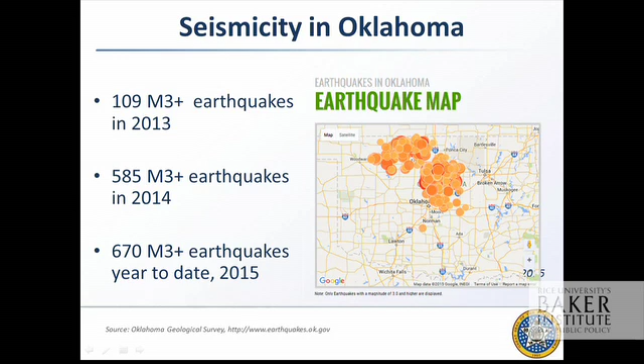That's the toggle showing all the earthquakes, probably just this last year. There's another toggle below that—you can also show where all the injection wells are. So we're not hiding anything, we're not pulling any punches. We think it's disposal wells.

But I can bring my hands this close and say it's disposal wells—I don't know what aspect of a disposal well. I don't know if it's depth, I don't know if it's volume, I don't know if it's rate. Is it big wells, little wells? Is it time of day? But it's disposal wells.

We have 4,200 disposal wells in Oklahoma. And that doesn't count Osage County, which is a really bright white one up there, because in Osage County the BIA manages or attempts to manage the oil and gas industry. So we don't regulate up there.

4,200 disposal wells. Now, Larry Bengal, the oil and gas guy from Arkansas, gives me crap all the time that they fixed their earthquake problem because they had six disposal wells and four earthquakes—or flip that around, something like that. Six disposal wells, four earthquakes. They shut down the six wells and the earthquakes stopped. Okay? We're working on 700 earthquakes, 4,200 disposal wells. You cannot find, or we cannot find, the one-to-one correlation that would make this much, much easier—certainly much easier from a regulatory and operator standpoint. This is an area problem, but it's absolutely about UIC wells.

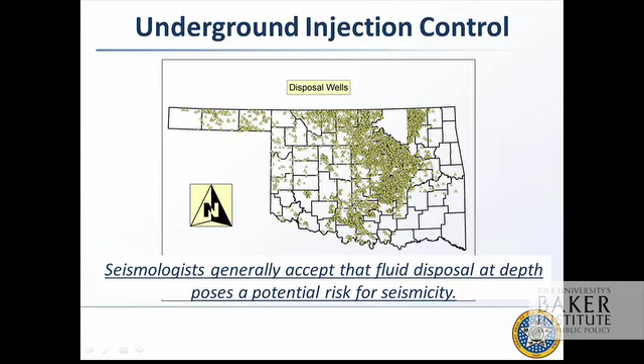So, tying back to what Roy was talking about, is there an opportunity to solve not just the earthquake problem? That's how much water we disposed of last year in one year. Kate this morning was showing pictures of Lake Travis—for us, if you're from Oklahoma, that's 1.5 Lake Thunderbirds, which is the water supply for Norman and South Oklahoma City. That is a lot of water.

So is there an opportunity that we can go after? I really appreciated that Kate showed a drought slide today, because I normally feel like I'm the only guy at an oil and gas conference who talks about drought. I know, from looking for fresh water, but there is not a silver bullet to the drought.

Now, I did cheat a little bit—that's the drought monitor from May 5th, five days into the month of May, when we got 28 inches of rain in one month. Very much what Austin got as well. The drought picture looks very different right now.

The problem I have with that is people think the drought's over, success, declare victory and go home—and it's coming back. This is not the last time Oklahoma or Texas or any of the western states are going to be fighting a drought. So what are we going to do to be drought resilient? We've got to be better about it. This is not a silver bullet.

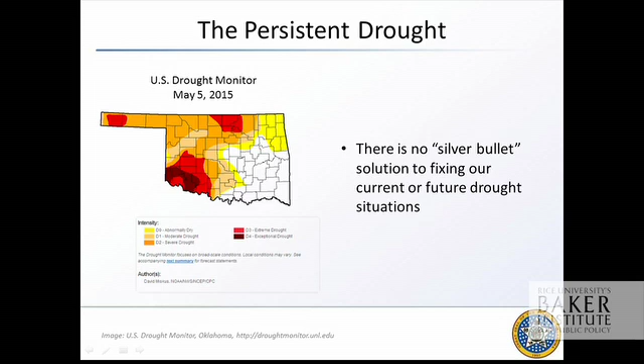Water conservation is a huge piece, okay? People keep looking for new sources of water. I might have your new source of water, but it's not cheap and it's not ready yet.

So this is a picture of a Devon facility, at the Cana Woodford. It's their recycling facility. Similar, Roy, to your comments, this is about using less fresh water and using it smarter. In one of their operations, can they take their flowback water, because it's not that high in TDS—their produced water—can they clean that up to at least a level that they could use at the next well? There were regulatory and technology barriers to them doing this.

On the regulatory side, it was really where the state came in with the Corporation Commission. How do you change, make exceptions to your current regulatory framework that allows innovation like this and still protects the environment? Because you've got to do both. On the technology side, that's really not what the state does, but the same thing—there were barriers, and how do you overcome those?

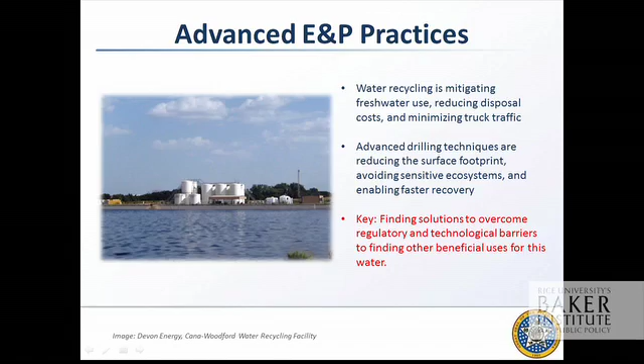And my question is, can you do the same thing for produced water? So I took off 'beneficial use of produced water' because I really think this is about drought resiliency, not just beneficial use of produced water. And you know, if you just change that piece right there, you change the conversation. Because I keep talking about drought resiliency with a bunch of oil and gas guys, and they stop.

In the middle of that they say, 'I'm not in the water business.' You brought 1.5 billion barrels of water to the surface—you're in the water business. Get over it, okay? And you live in Oklahoma, so be part of the solution. Just changing that title is huge.

The fact, Linda, that you've brought this group together, and that Tony spoke at lunch, that's huge. Because if we don't get out of our silos, we will never fix this problem.

So the opportunity is the same—it's produced water on the side, and the big black box in the middle is technology to clean water at scale.

So Rick McCurdy is here—I will use your example. Rick has a folder on the desktop of his computer called 'The Solution.' At last count, there were several hundred PowerPoint presentations in there of somebody claiming they've got the Holy Grail. And that's not to make fun of the companies that are starting to really be serious about this.

I'm really glad that you're next on this agenda, because there are companies out there working on this that really do have a good solution, and recognize that they may not have the Holy Grail, but they've got this piece of it. So can I get that piece, and this piece, and this piece, and start putting these things together towards a solution? I think we've got to do that, but it's got to be at scale.

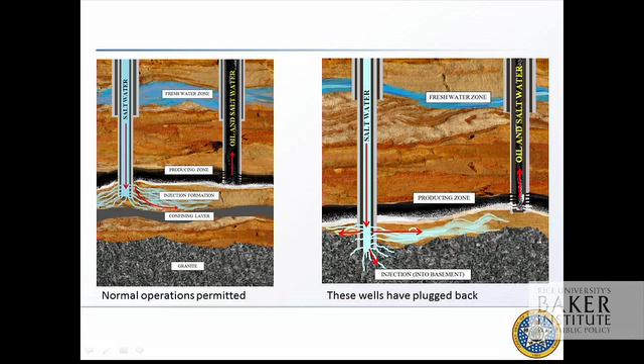If you talk to Kansas, they think it's volumes. So Kansas took two counties, Harper and Sumner I think is the other one, and they've stair-stepped the volumes down in those two counties about 50% because they think it's volumes. We're both watching each other to see which one works. It sounds funny, and it's not funny if it's your house, but nobody knows yet, and we're watching each other to see - if that works, we're doing it here, and if this works... I actually do think it's a combination.

Thank you, excellent presentation, both of yours worked really nicely together. To achieve your long-term vision, what kind of partnerships and stakeholder engagement, what different groups need to get together to achieve the longer-term vision of keeping the water in play?

We're probably about a month before we announce something. When we brought this coordinating council together for seismicity, it was really pretty easy to figure out who ought to be in that room - the geologists studying the problem, the regulators, the Corporation Commission, the regulated community, the academic community. I think on this one it's water providers and users. So I don't need somebody in there who says, I'm an oil company, not a water company - that's not helpful to the conversation.

We need companies that are being proactive about it. But it needs to be oil and gas, it needs to be utilities, it needs to be municipalities, it needs to be the ag community, it needs to be our regulators at the state, and probably some of our federal folks as well, federal partners - that's sometimes a hard sell in Oklahoma and Texas.

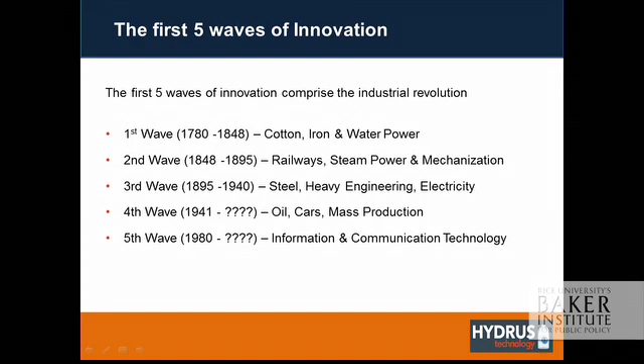The Russian economist Nikolai Kondratyev first postulated the major cycles of innovation in 1925. The five initial major economic cycles have been defined as the Industrial Revolution, the age of steam and railways, the age of steel and electricity, the age of oil, cars and mass production, and the age of information and communication.

The global financial crisis of 2007 to 2009 highlighted the start of what I call the sixth major wave of innovation, that of resource efficiency. This new wave is heralded by changes in the market, societal institutions, and technology that reinforce each other, including rising scarcity of ore grades, increasing water demand, and growing recognition of the economic value of the environment beyond its potential as a resource.

The sixth wave is more than finding new ways to generate energy. It's about minimising inputs, maximising outputs, and minimising or eliminating waste. This thinking provided a massive opportunity for a water treatment technology that went beyond the traditional chemical and membrane approaches that dominate the world today.

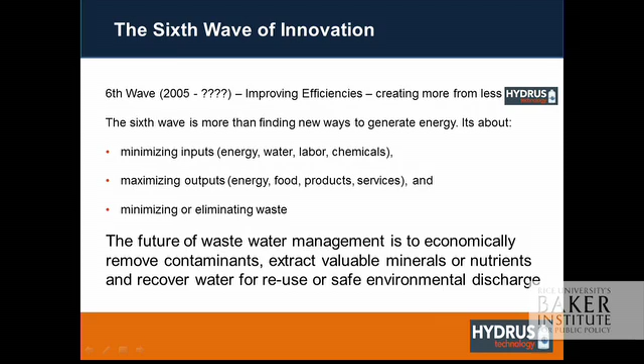Hydrus Technology is a technology company, and our approach to the market is to adopt an outsource manufacturing partnership style to deal with compliance, quality, delivery and logistics, and then leverage implementation partners to operate our units in the field with their clients.

The Hydrus model is the Intel Inside approach. We provide front-end technical sales and support, the hardware and training to operate it, and back-end technical support. All our units are remotely managed and monitored, so we know exactly what's happening at every step.

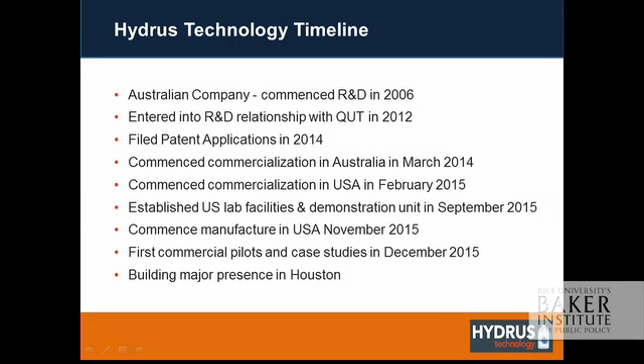Our reason to build a manufacturing and implementation partner model is, on one hand, to deliver a better product, but on the other hand, to streamline the legal and regulatory obligations and requirements upon us as a new entrant into the water treatment market, particularly relating to the energy and mining sectors.

Hydrus is at the leading edge of the paradigm shift in the way water and wastewater is treated and processed in municipal, energy, industrial and resource plants globally. We have set the new benchmark in cost-effective recycling of wastewater, removal of harmful contaminants, and recovery of valuable nutrients and minerals.

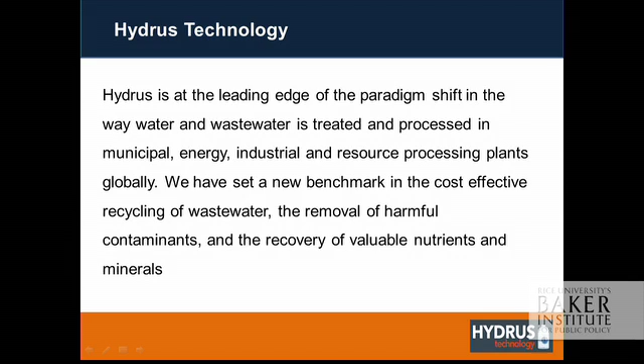Positioned at the intersection of this shift, Hydrus offers exclusive patent-pending technology that provides significant cost and benefit analysis and productivity improvements across a range of industries with global relevance. Hydrus' approach has been to make it disruptive, make it enabling, develop a compelling value proposition, back yourself and go hard.

Hydrus has developed and owns the intellectual property for advanced electrochemical and catalytic enhanced oxidation processes. That might sound like a mouthful, but we have a range of chemists back home in Australia that live and breathe this all day long. Our technologies have broad application across the energy, mining, industrial and food production sectors.

We have enabling technology with proven capability to solve some of the world's major commercial, natural resource, and environmental challenges. Hydrus technology provides wastewater treatment, mineral recovery and environmental remediation solutions that use significantly less chemicals and labour inputs to achieve greater treatment capacity with a smaller environmental and infrastructure footprint.

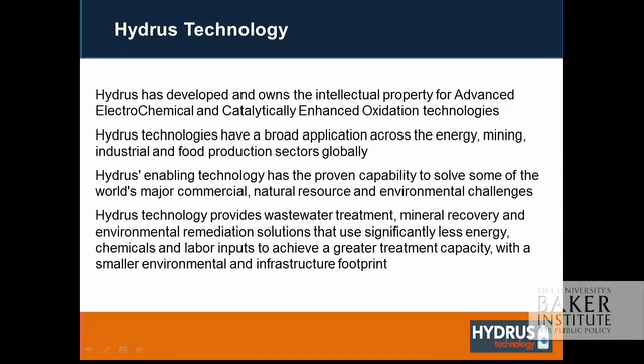We've developed the intellectual property that delivers high-value solutions, and around that we spent many years working on an old technology called electrocoagulation.

That technology was first invented in 1906 and wasn't ever much good. It wasn't until the mid-80s that an American made it tolerably acceptable, with unpredictable outcomes, highly expensive, highly inefficient in our view, difficult to maintain, difficult to operate.

So in 2006, we developed the technology, or we deconstructed that technology, and at a molecular level understood how it works. What happens when you turn on the power? What happens when you change the flow? What happens with the total water matrix, boron at one level, barium at another? How do you really deconstruct water and reconstruct it without the contaminants?

When we reconstructed the technology, we built what we call the Hydrus value spectrum. That means if you look at the vertical market applications, the more complex the wastewater stream, the lower the competitive landscape and the greater the value to Hydrus and its clients.

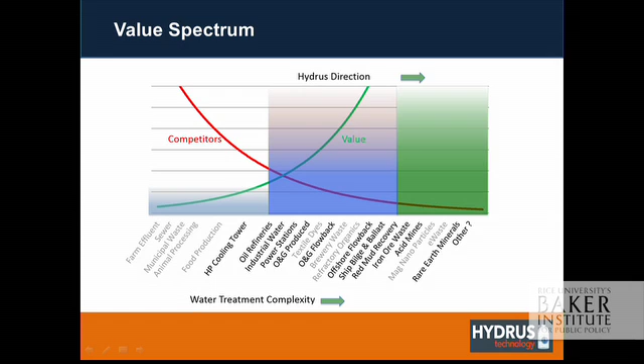We don't operate in the low end, municipal waste, sewerage and those. We have a value proposition there, but everyone else does that. We work in the complex to more complex end of town, which is oil and gas wastewater, acid mine drainage, nanoparticles, and other seriously complex water treatment issues that membranes and chemicals just can't solve, or can't solve economically.

By way of example, hydraulic fracturing has been around for a long, long time, probably 75 years, and it wasn't until about a decade ago that it was optimised and changed the game to produce the outcomes we all know today. The electrocoagulation technology we've worked on has been around since 1906, but it wasn't until we took hold of it in 2006, with Queensland University of Technology, that we deconstructed it and turned it into what it is today.

The first vertical market application we're engaging with is the oil and gas market. We've invested considerable time and resources in conjunction with the Queensland University of Technology to further research and develop treatment solutions for the fluids used in exploration and appraisal, stimulation, completion, production, and workover drilling operations.

In Australia, our first phase of commercialisation was to prove the commercial benefit to customers. In this climate that means demonstrable bottom line savings and compelling operational efficiencies. You can talk environmental benefits all day long, no one really cares, until you prove up the cost benefit equation. Then you add the environmental benefits as a freebie, and that gets their attention — they get to have both.

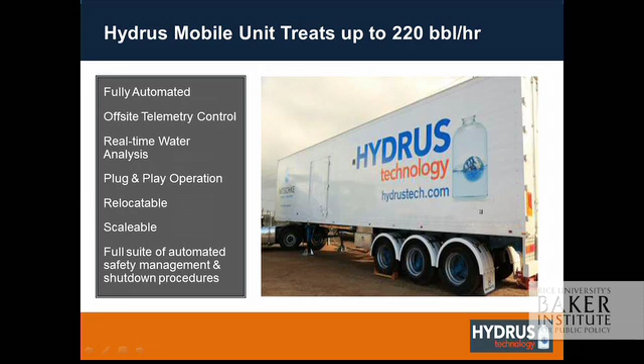That's a shot of the inside of the unit, so they're all managed by telemetry. We capture all the big data for future field production or for management use by our clients. It has minimal labour inputs required — simply a roving technician on the oil field can monitor the device 2 or 3 times a day, and it can manage a wide range of contaminant inflows without recalibration.

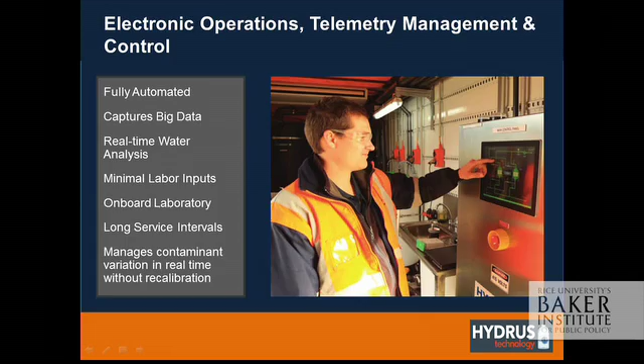To give you an example of how we operate: we take a water sample from the client and undertake a very detailed and comprehensive water analysis to understand the entire water matrix. Then we ask the client what it is they want as an outcome of this water, depending on whether it's for reuse, environmental discharge, irrigation, or cattle stock watering, etc.

We then run the water through our stage 1 device in the trailer and produce the results the client requires, using pH, pressure, electrical potential, oxidants, catalysts, and some proprietary accelerators we've developed. The stage 1 EC technology in this market, certainly in southwest USA, is sufficient for reuse in fracking or in the oil and gas field. We can take out boron to required levels, barium, iron, bacteria and other contaminants, so we can, to an extent, dial up the water mix required for the next frack job.

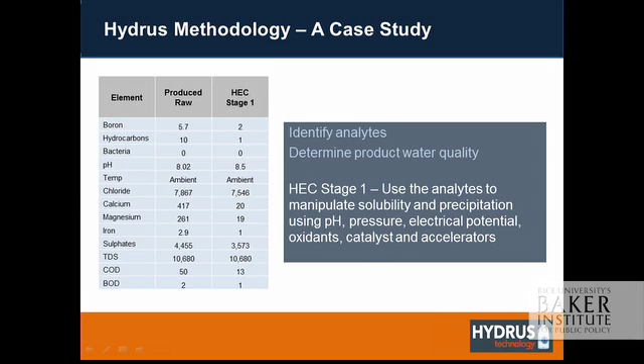To the extent the client requires improvements in water quality, whether it be for irrigation or, dare I say it, drinking water quality, or environmental discharge, we can run it through stage 2 or stage 3 Hydrus technology, all resident within the trailer.

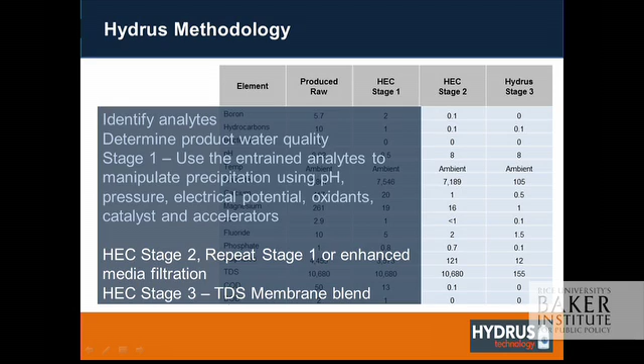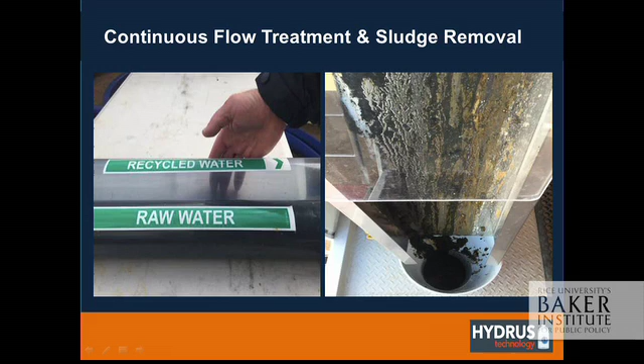So the Hydrus proposition is to buy less fresh water, haul less fresh water, treat wastewater on site for reuse, and avoid hauling waste off-site and disposal fees.

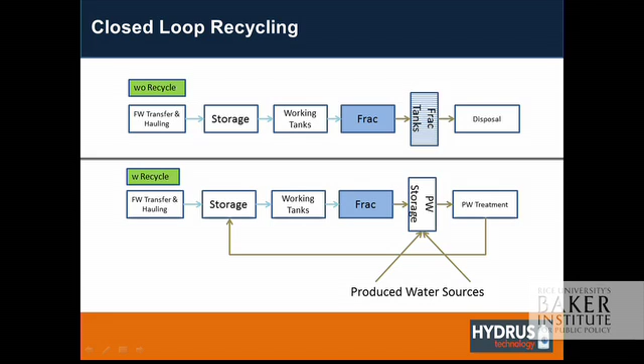The Hydrus technology value proposition is to reduce transport of fresh water to site, reduce transport of fracture flowback or produced water off-site, eliminate waste disposal charges, and improve water use and management logistics. You'll end up with final products that are clean, clear water and a benign, spadeable landfill.

The treated water can be reused in drilling operations, stored, or used for safe environmental discharge, and we can dial up specific water outcomes.

There isn't a technology that we've come across that can degrade refractory organics, particularly those used in fracture flowback fluids, like Hydrus can.

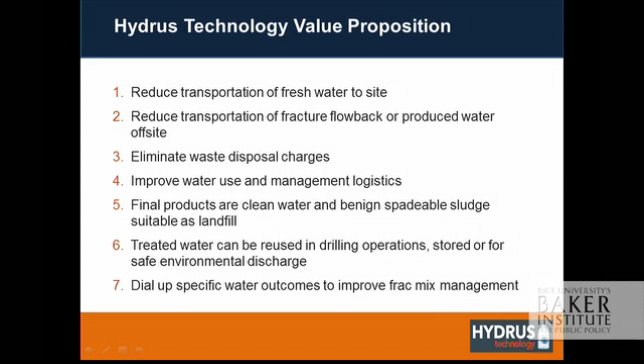We can produce multiple options for water treatment. We can produce fresh water for discharge. We can produce water for reuse. We can have a custom solution depending on the water requirements, and we can deliver onshore or offshore benefits.

The financial benefits include reduced freshwater purchase and transport costs, reduced wastewater transport costs, reduced wastewater disposal costs, reduced chemical costs, reduced labour costs, and reduced capital expenditure. The way we look at it, we can reduce the cost of water by 14 to 40%, depending on where you're drilling and what the logistics are around your particular operation.

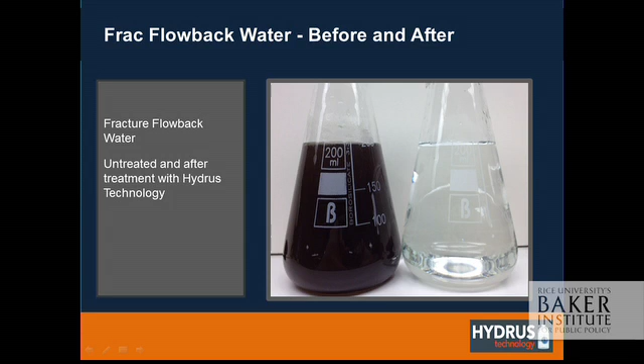The environmental benefits are greater compliance. As I said before, the companies we're dealing with in Australia and the United States, it's all about the money. Show me the money, then talk about compliance or regulatory or environmental compliance next. We have the benefit of offering both. The second one comes free. You get the good corporate citizen status. People are sick of having trucks barrelling down the highway at 3 a.m. and road degradation. There's a whole range of good things around better environmental compliance, whether that's now or coming.

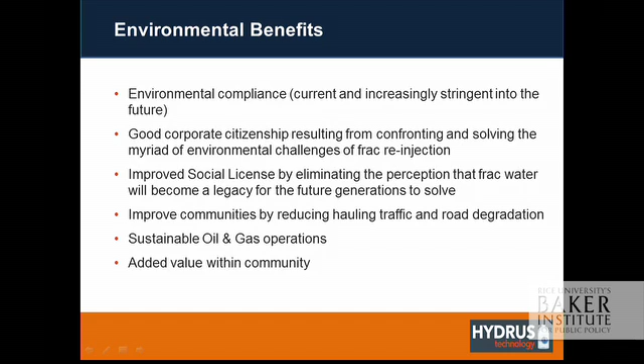We also believe that we can offer a better, more sustainable oil and gas operation because our water treatment costs are less.

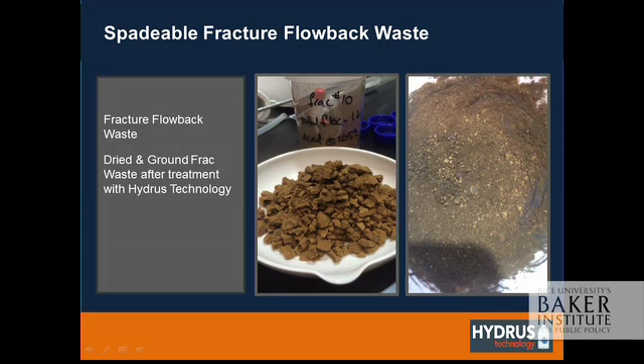That's the spadable, benign landfill that comes off production water. In Australian standards, that is EPA approved as a second-grade landfill. So there's nothing hazardous, nothing toxic. It can be disposed of either on site in the drill area or to any unregulated landfill for nominal fees.

In 2014, we won a competitive bid process in Australia for a fracture flowback treatment job in the Cooper Basin for one of Australia's largest oil and gas providers. We beat 9 other tenderers in that process. The other 8 or 9 were Houston-based rivals, incumbents.

With that in mind, we felt back in February '14 we should come to the US and at least have a look to see what the landscape was here. If we could win in the Australian market, we thought we had a value proposition in this market. In Australia, the client said we had the best water treatment technology they had ever seen to treat production water at the right price.

Since making several trips to the US since February, my wife and I are now token Texans. We live here and we have established operations. We've set up a laboratory facility with ALS on the Southern Freeway, where we're now conducting demonstrations of clients' water in our lab, demonstrating the sorts of results we can deliver.

We start manufacturing next month. We've selected a manufacturer in the US and we're building our first 6 units, and we'll be engaging in pilot trials, full-scale pilot trials by December, and writing case studies. At that point in time, we want to engage with the market and make our technology known and invite anyone in the room who wants to come and see it or engage in the process to speak up.

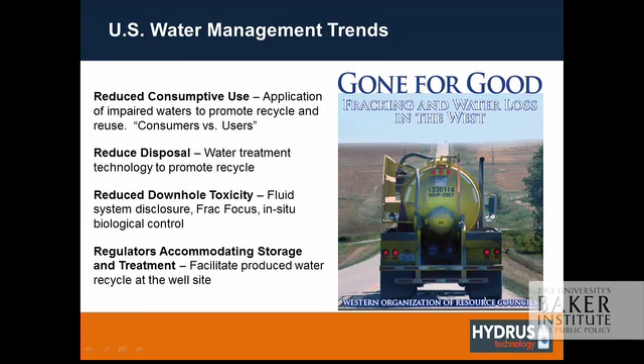Certain states we've learned have adopted regulations that allow produced water to be reused. What we mean is that both state and federal produced water policy for the past few decades has been structured around managing produced water as waste, and we don't see it that way. In the past few years, we've seen innovation by oil and gas operators and service companies to utilise produced water in a recycled capacity.

Recognising this opportunity, states like Texas and New Mexico have adopted regulations that allow for this waste to be reused. Other states, including California, Wyoming, Colorado and others, allow for direct discharge of treated water meeting drinking water standards. We think the bar is a bit high there, and I think we can deliver very acceptable agricultural or stock water purposes without necessarily meeting a drinking water standard. We don't think there's any risk to the environment by not meeting quite that bar.

The BLM has, on the other hand, slightly tougher regulations, but I think there's some rhetoric around some of their policy changes that suggest they may be open to more of a softer approach to recycling and reuse rather than just storage, containment and using frac tanks to lock it away or dispose of it.

No matter what happens from an environmental point of view, we see that the go-no-go decision with any producer is the cost-benefit analysis. So back to, we provide a cost-benefit analysis, and the environmental solutions come free of charge, in our case.

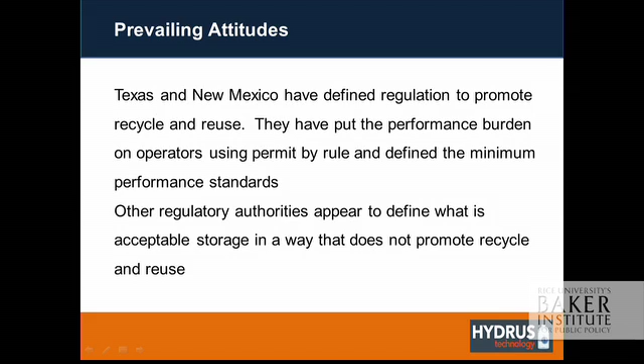So what's the better outcome? Produced water recycle and reuse supports humanitarian and environmental objectives. On supply side, recycling produced water reduces freshwater competition between oil and gas industry and municipal and agricultural users. On the disposal side, it reduces the potential for environmental degradation.

Containing produced water using in-ground impoundments provides for economies of scale that are safer for the environment when utilising engineered systems to contain post-production treated water. By contrast, stringing frac tanks together is much more difficult to manage, leaving room for human error and spillage.

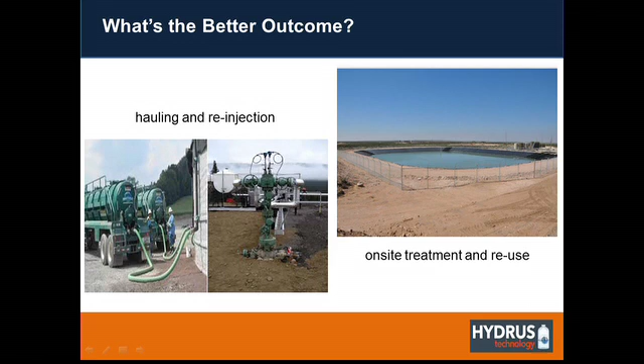So what's the better outcome, both economically and environmentally? Trucks, chemicals, re-injection and environmental risk, or reduced water consumption, reuse, cost saving and efficiency, which is what we call the sixth wave of innovation.

So in our words, the future of wastewater management is to economically remove contaminants, extract valuable minerals or nutrients and recover water for reuse or safe environmental discharge. Hydrus's approach has been to make it disruptive, make it enabling, develop a compelling value proposition, don't stop overcoming the hurdles and go hard. Thank you.